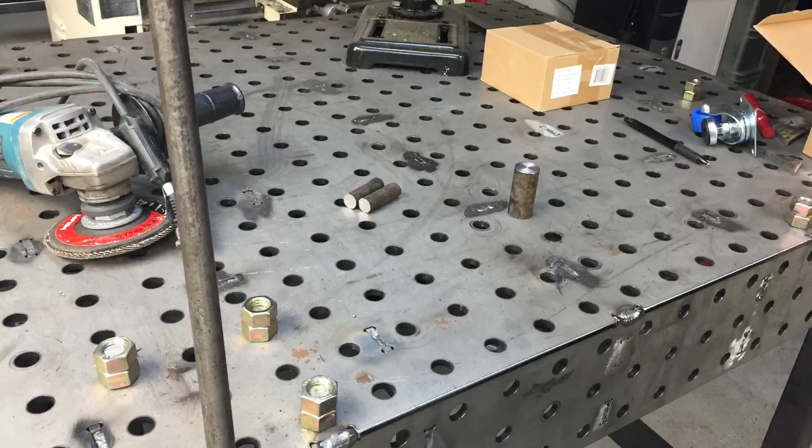Tonight we're going to make the first trial pin for this CertiFlat welding table. This is the 3648 fab block from weldtables.com, and hopefully you enjoy the video. If you were looking for something to get started, I think these are pretty handy.

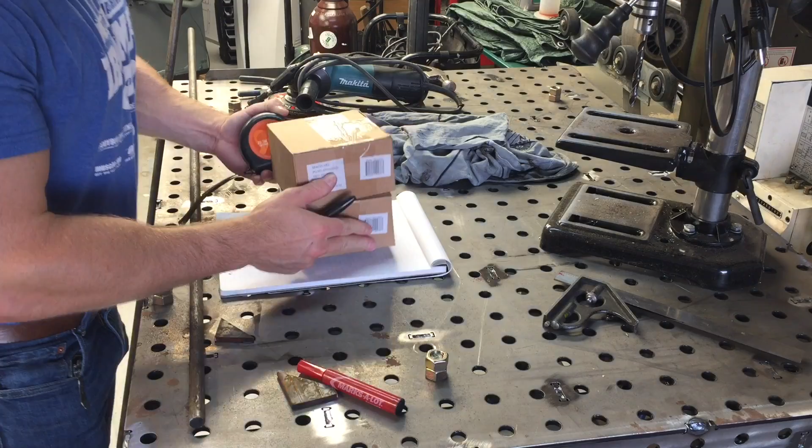Hey guys, got something I'm working on I wanted to share with you.

What I've got here is some 5/8 diameter 1018 steel, and what I was thinking was making some quick little... I don't know what these things would be called. I've never had a welding table with fixturing capabilities before, but for lack of a better word, I'm just going to call these things studs or pins. So I take the 5/8 diameter 1018 steel and cut off, let's say 2 inches for now. I'll cut a series of these off. Let's go ahead and mark this every 2 inches, and I'll do a couple as a trial run.

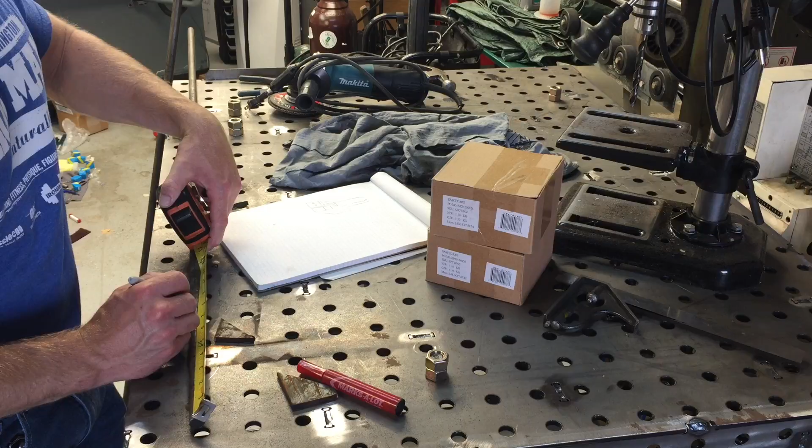What I'm going to do is take my portaband, my portable bandsaw, and cut these off. Then I'm going to take some more 1018 steel, in a 1-inch diameter. That way I can go ahead and locate these things wherever I need a pin dropped. I'll use this as the pin to actually fit inside of these holes.

These are 5/8 diameter holes, actually I think they're like 628 thousandths or so. Let me see here... anyway, I think these are about 628 thousandths, and this is 625 thousandths, so we'll have a pretty decent fit. It will allow a little clearance just to get in and out, and if there's any slag or something in the hole from the laser, these will still work.

So the whole point of this thing is to be able to do some quick, accurate layouts. The reason I was thinking 1-inch for the outside diameter of the top part of the pin would be so you have an easy number to work off of. These have a 5/8 diameter hole spaced exactly 2 inches on center apart from each other, so when you drop a 1-inch slug in here, you can work off that real easy. I like the 1-inch diameter, and you're going to need something stopping it from dropping all the way through anyway. So that's what I'm going to go with. We'll just make a couple and see what you think.

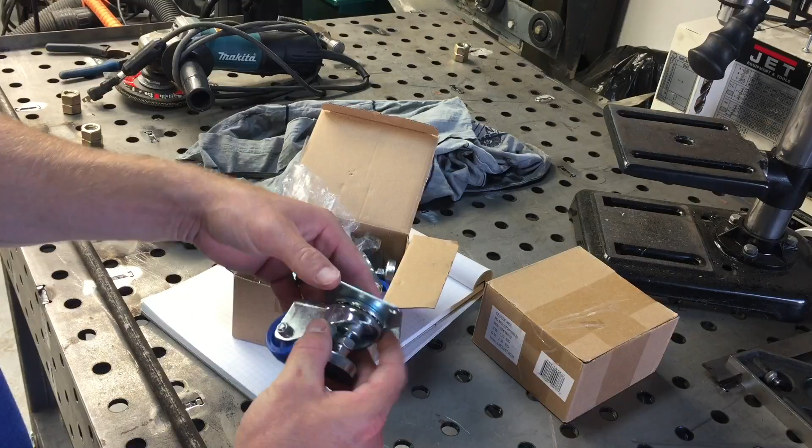Another thing I want to show you, not on that same subject, but I think it's pretty cool. You probably notice I put everything on casters around here because I have a really tiny shop and too many tools and projects going on. So I found these casters on Amazon. Obviously these aren't super industrial, but I think they have a capacity of about 200 pounds each. This is like an inch and 5/8 diameter wheel.

It's got an actual standoff or leveler on each one of these casters. You get a 4-pack of these for about 15 bucks. I think this is ridiculously cheap for the value it adds. As long as you're putting these on something that doesn't weigh a ton, you're going to be fine. Really cool find.

I wish I would have found them earlier. If I find some larger ones, I'm going to buy the heck out of those while they're available, because I'm constantly building stands for things, and what a nice feature to have, to be able to roll it into position, drop your levelers, and get the thing stationary. It's a perfect example of what I actually should have for this.

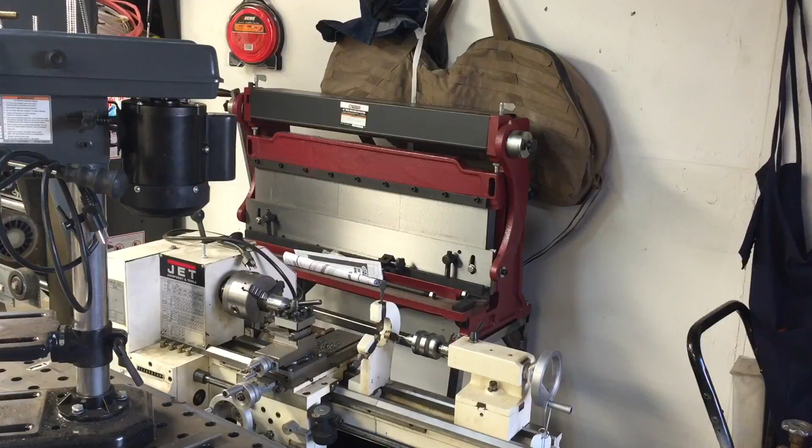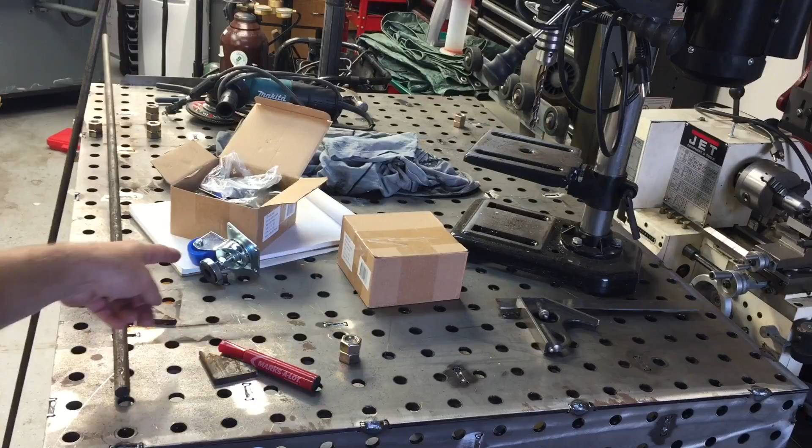So last week you probably saw the video for that 3-in-1 press brake, slip roll and shear, and I made that stand for it. Well, you know what, when you go to use that thing, you don't want the casters rolling, and even if you have locking casters, it's still going to shift a little bit. So it would be much better to go with these guys and be able to lower them down once you get it into position, and have something fairly sturdy.

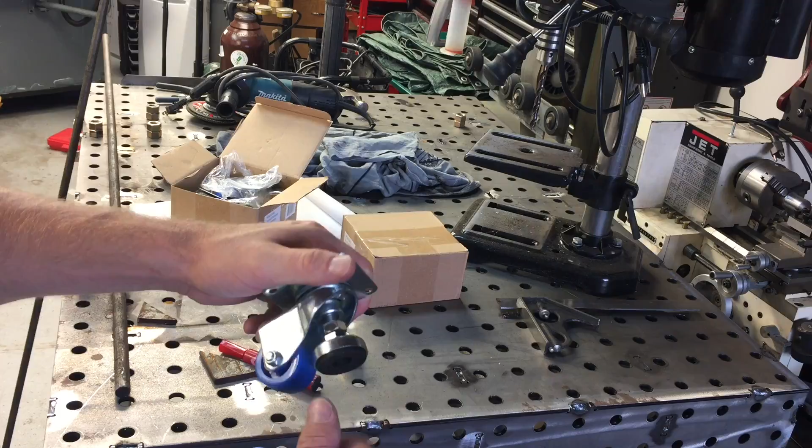Obviously I haven't installed them on anything yet, but I can tell the construction is at least as good as the Harbor Freight ones you buy, and they're probably less expensive than it would be to buy the same ones I put on that shear last week. So yeah, what a great little find.

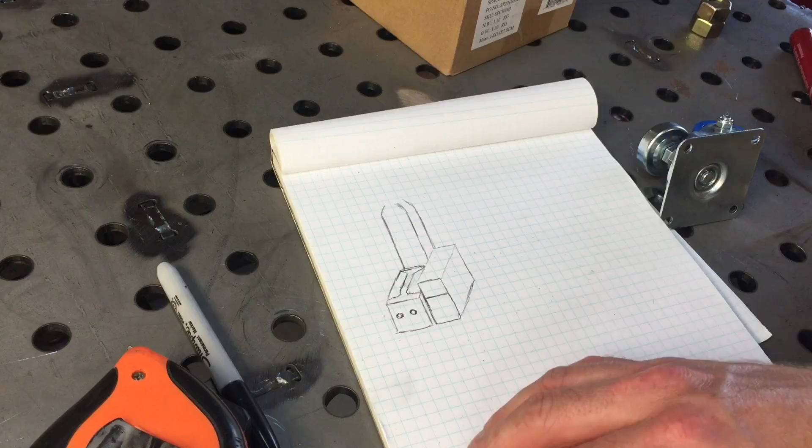All right, so I'm going to draw my idea so you guys can visualize what we're gonna be doing here. So like I said, we're gonna be taking that 5/8 diameter stuff and doing the deal with it.

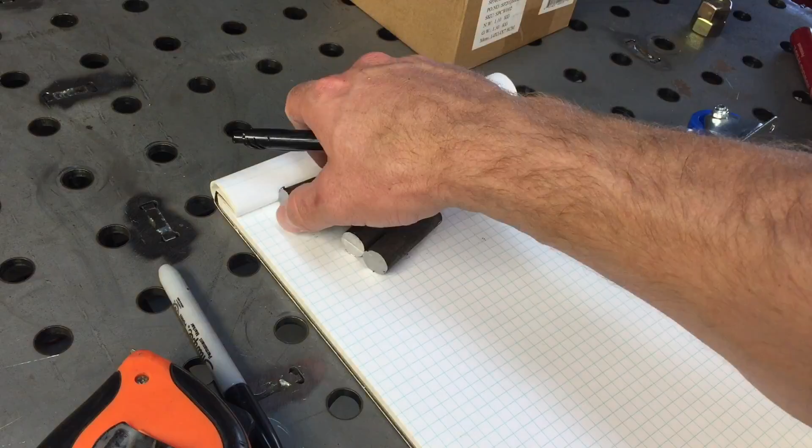Grab a pen here. So I've got a couple of these made now - shouldn't say made, I've done a couple of very rough cuts with the Portaband. Just marked them quick with a Sharpie and cut them off, so there's no real tolerances held there at all. But we've got 4 pieces, and just to show you the fit, it's in here. There's just a hair of wiggle.

So if you were to shove really hard on this, it could rock. But as long as the 1-inch diameter piece that's going to be shouldering and slipping down, basically touching against the flat surface of the table, you shouldn't have a hell of a lot of rocking like this. So hopefully that adds some stability to this.

This amount of slop isn't a lot. So anyway, I think for fabrication, as far as welding things up, this would be acceptable. As long as you had constant pressure against your pins, this slop would be eliminated. Say you wanted to do a 90-degree or whatever, you could have 2 of them here, as long as your piece was shoving up against that, and your next 2 pins wherever they're going to be, and then 1 more to the side. As long as everything's held tight, it will eliminate that slop.

There goes 1. Now, how this is going to go down, I will have one of these pins. Can't even draw a straight line.

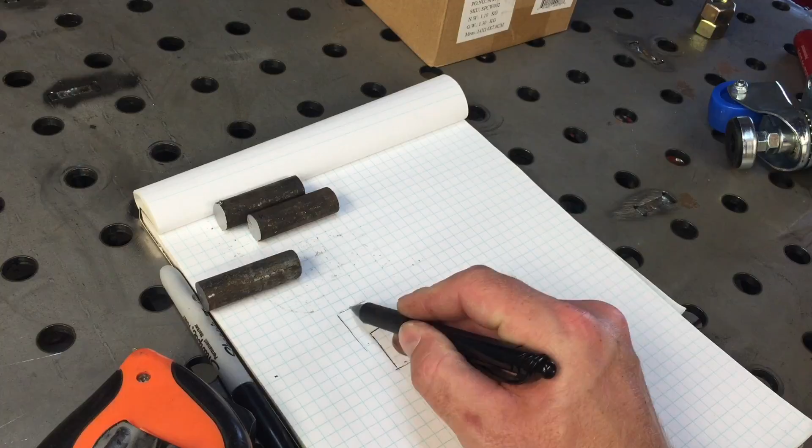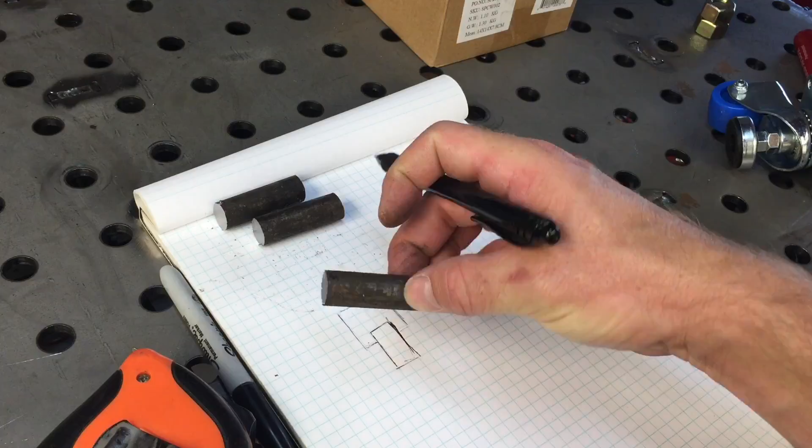We're going to have one of these pins, and then we'll have our 1-inch diameter. I don't know how tall I'm going to make this thing, I'm probably just going to make 1 or 2 or 5 and see what I think. And then what I was thinking of doing was having these recessed into a bore in that 1-inch diameter material. So we basically leave these suckers in their raw form, other than maybe cleaning them up a bit, getting that factory crap off of there, and then do a press fit into the 1-inch diameter piece. I think that'd be pretty slick.

Again, this pen's not working too hot, but I've got another one in my pocket.

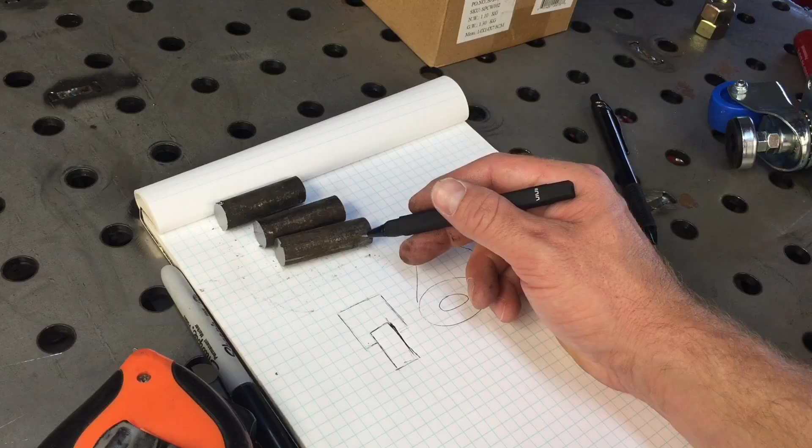So as an isometric view of that thing, the 1-inch diameter would be like this, and then it would have a slightly under 5/8. I don't know what diameter I should use for this - I'm gonna have to mic these and see what they actually come out to be once they're cleaned, and then I'll make this probably 2 thou under that, or whatever the press fit should be. I'm not sure, I have not done a lot of press fitting, but I'm assuming it's probably about 2 or 3 thousandths you'd want that to be over.

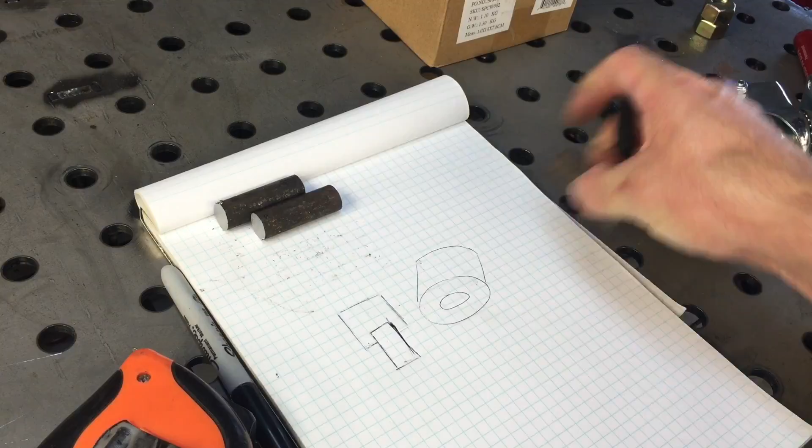And then if you want to do an interference fit, you could preheat your 1-inch diameter piece and chill your 5/8 diameter male part, and then stick it up in her. Yep, so that's the plan. Let's see what we actually do.

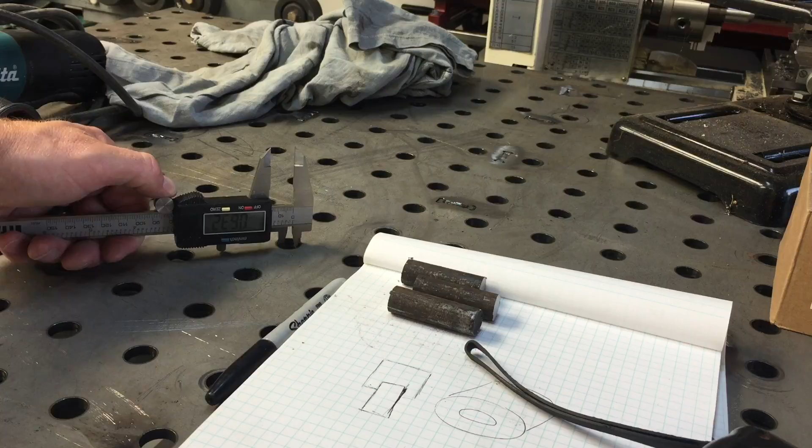All right, so we've got some inexpensive digital calipers here. These are cheap, but I found they're actually pretty damn accurate. So let's check our bore dimension of the table. Right there, I don't know if you can see that well, but I'm getting about 633 thousandths, .633. I'm sure as I rotate this, I'll probably get a slightly different size too.

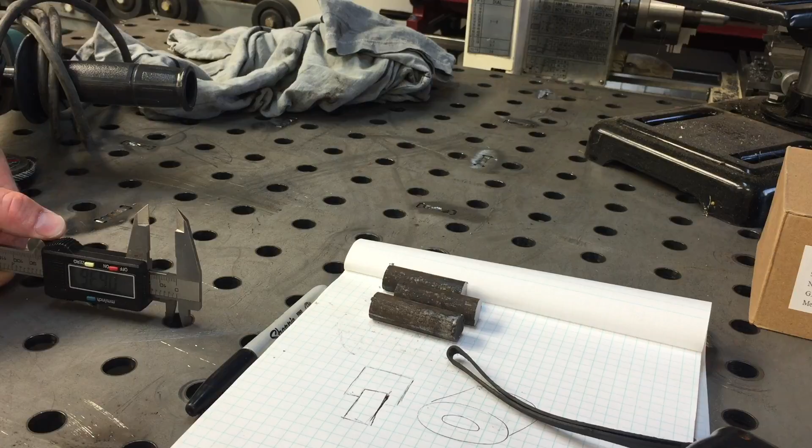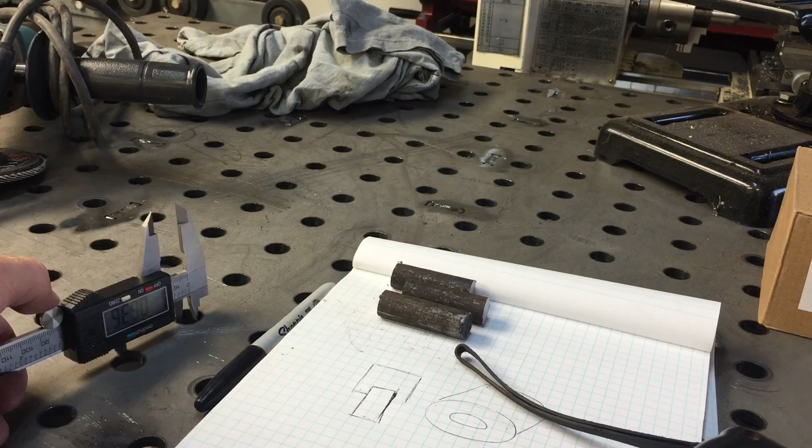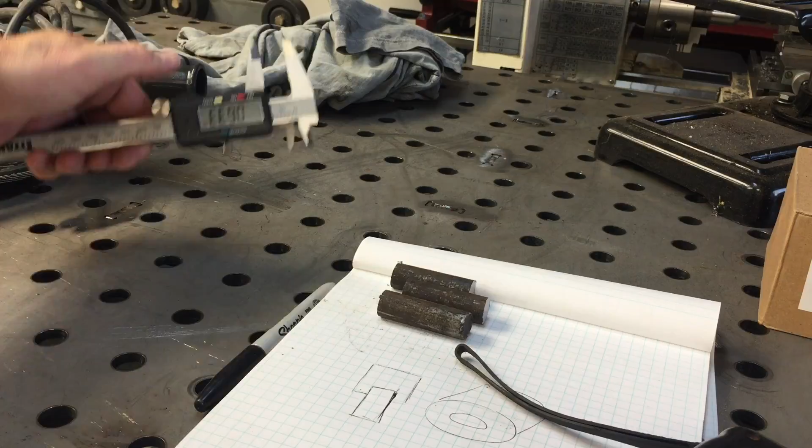I've got 635 there. Let's go around here - 635. So looks like 633 is probably going to be my small, 630, 632. So we'll just say we're going to get on average about between 632 and 635 diameter on these holes. I'm not going to measure them all, but that's what I'm getting here.

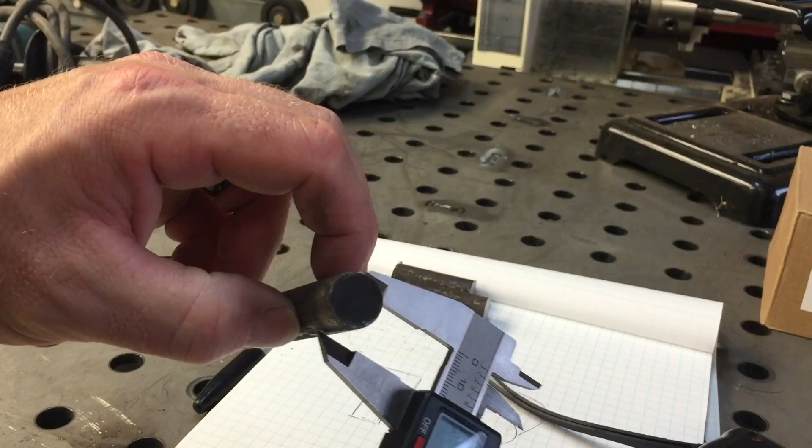So let's measure what these actual pieces come in at from the factory here. And I get 623, so it's actually a 10 thousandths difference. That's significant. I'm still going to make some and see how the fit goes and see if it works out good, because man, would that be convenient to not have to really machine much and then just pump a couple of these things out. Well, we'll see what happens.

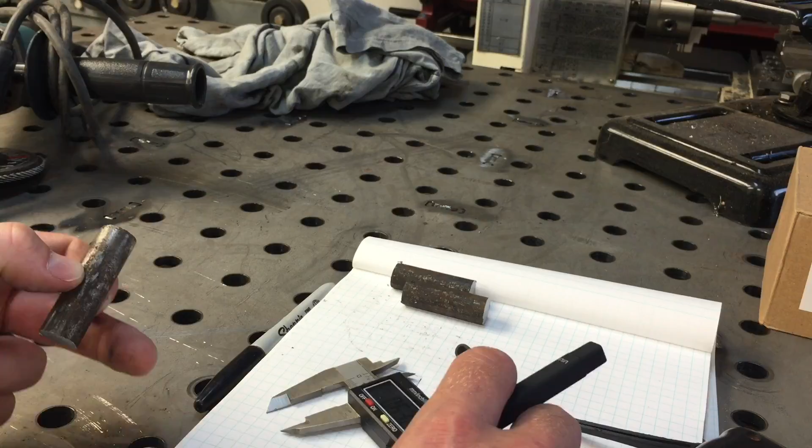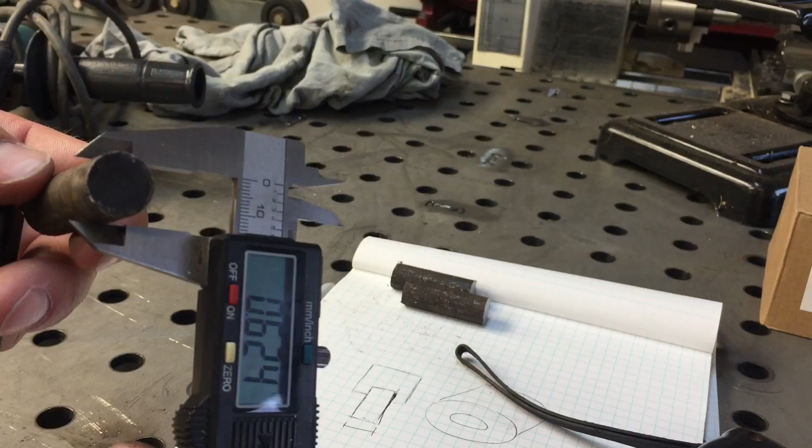So you've got that, the shaft diameter is - throw that on there again - 624, 623, 626, 622. There's a lot of crap on this too, so we'll just call it 623. Not that that matters because we're not going to be machining this down.

And then bore size, that we'll try to machine this down to. Let's say 620 as a tentative, 620 thousandths tentatively right now.

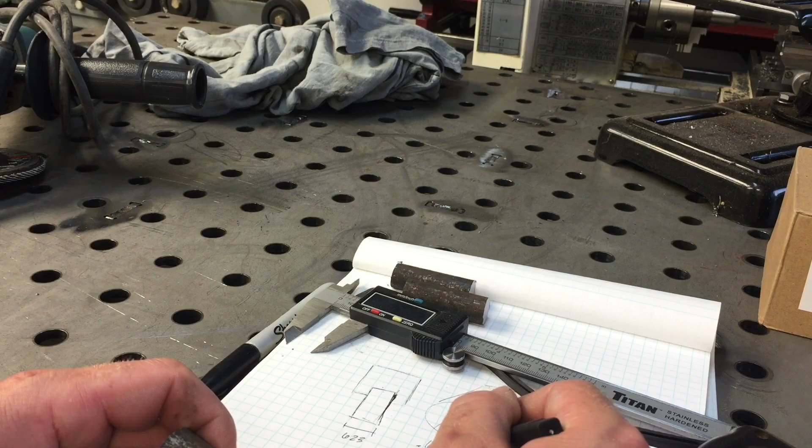You know what, let's take a time out on that little 5/8 diameter piece and let's focus on getting one of these bastards prepped. This is the 1 inch diameter guy.

I want to get one of these set up because I'm thinking of just drilling a hole with this drill bit I've got on the tailstock really quick, and then doing a quick trial press fit deal.

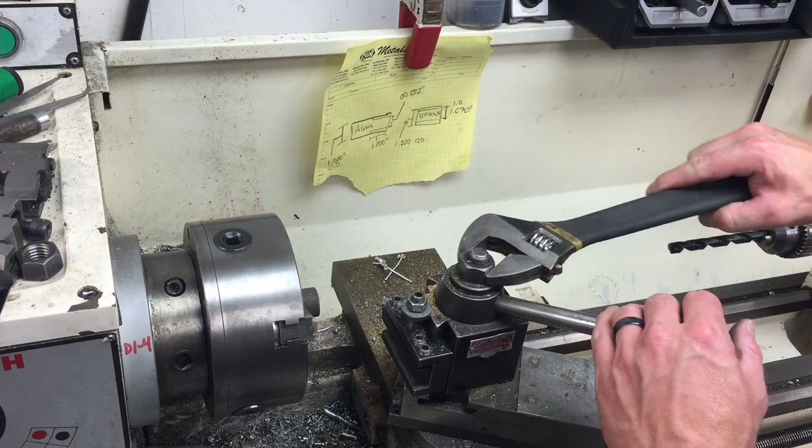I'm using the world's cheapest indexable cutters right now. This one's actually set up for doing threading, but I'm going to give it hell and see what happens. It's actually kind of hard to get in and get a really nice view while filming.

I gotta be honest, I'm not crazy about having the tripod wrapped up around what I'm trying to work on either, but I guess it's just a sacrifice for making these videos.

Alright, so that is machining great. I've actually got that faced off enough to where I could call it good. I'm going to take just a hair more though. I want to make sure the whole surface is flat.

So if you're new to machining, let me shut this off. You'll notice that when people are operating the lathe, they only bring it across halfway, because since the work is rotating towards you, the cutter only has to cut half of the diameter, and it's going to be getting the other end of the work too.

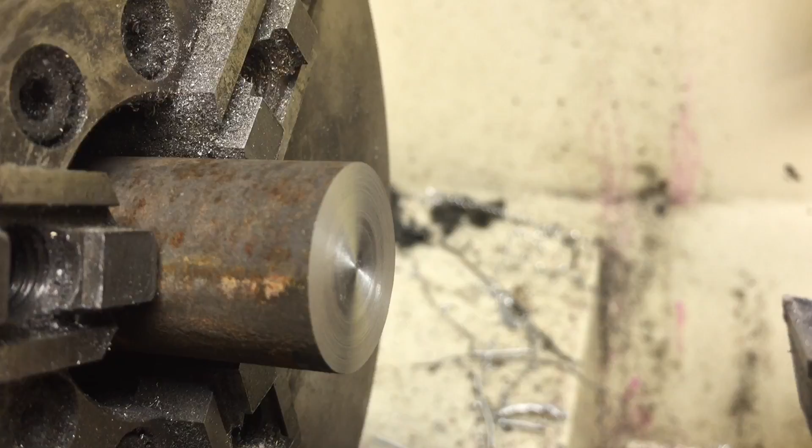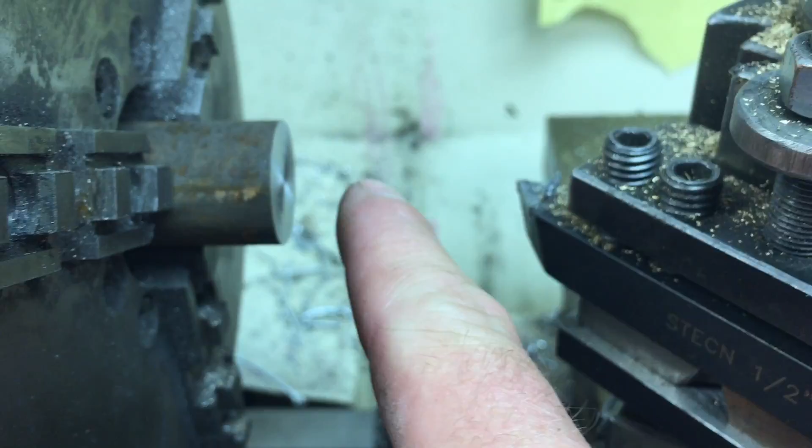So once we back away, you'll know if your tool is centered properly or not, because if it's too low or too high, you can end up with a little nipple in the middle of the work. Let me get in closer so you can see. On this piece, we don't have much of a nipple because the cutter itself is centered properly.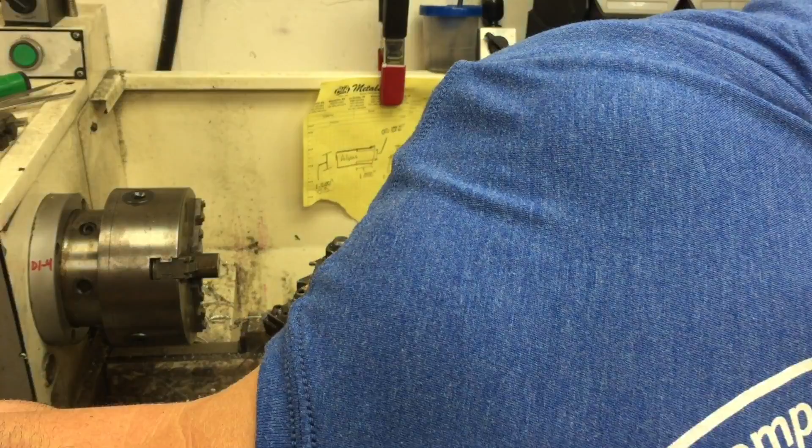Okay, now that I've got this part faced off, what I'm going to do is go ahead and get a center drill set up in this tailstock. I've got a 3-jaw Jacobs chuck here, and I'm just going to come in here and do a quick center drill. I'll put a little bit of cutting oil here, and I'm going to run it at 755 RPMs. That's good enough.

So I'm going to get the tailstock pretty close and lock it. I'm going to go ahead and just go in. This will allow our drill bit to be centered. Alright, that's a good start. I'm going to back this out.

This drill bit's a 29/64. Put a little bit of oil on that guy too. And we're also going to slow this machine down. I'm going to go down to 460 RPMs really quick, because that'd be a little fast, I think. You'll know if this is too fast, it's going to squeal like hell. We call it chatter.

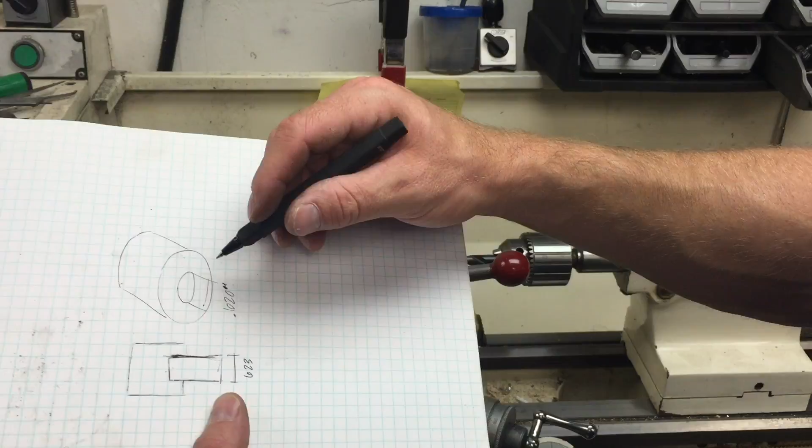So like I said, we started off with this as the general idea, but we've already switched. This was an ID, inside diameter, of 600 and what was that? I think it was 623. Just let me verify.

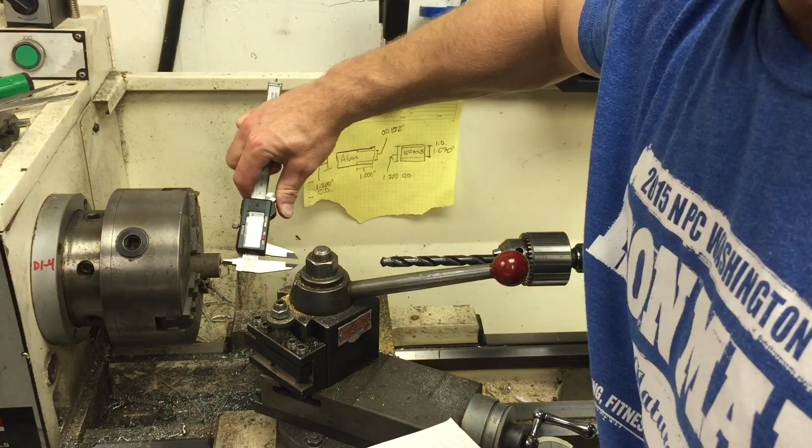Just making sure I'm not losing my mind here. 460. 461. Jeez.

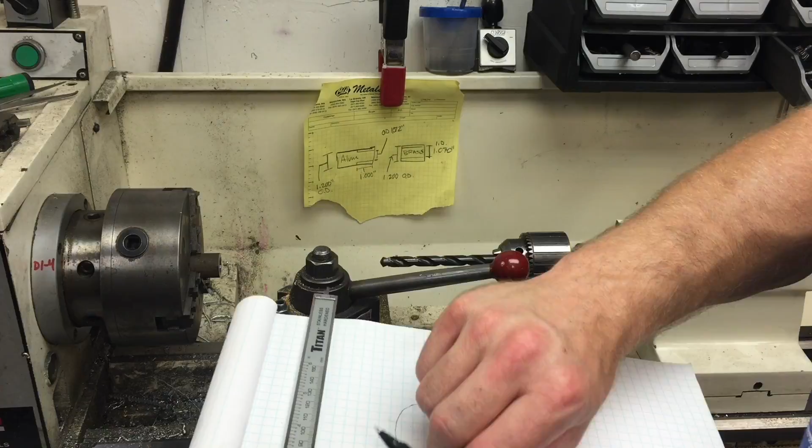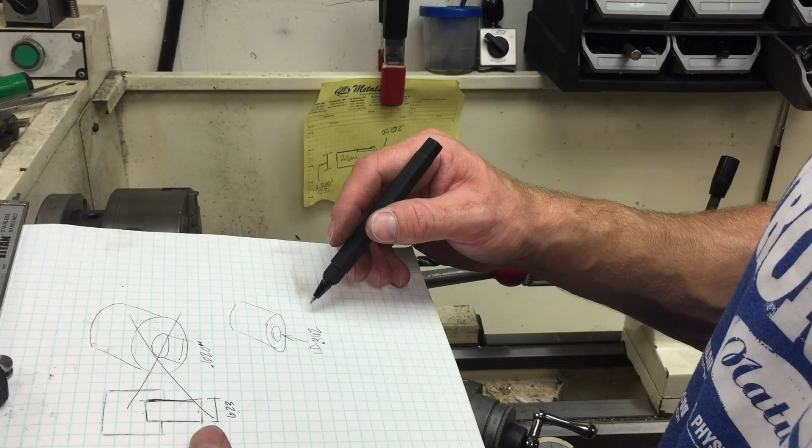Yeah, let's call it 462 thousandths. I'm going with the largest number because I don't want to go with the smallest one and then have the shaft be wrong. Actually, I should be going to the smallest. 462. Well, we're going to go with the male end OD at 465, see how that fits. So we're going to make that 465 thousandths.

It's not a good idea to store a bunch of crap up here on top of your lathe. It's not a tool stand, so don't do this. But if it's your shop, you do what you want. It's really not ideal, and it's a bad example to set for people that are trying to learn how to do this.

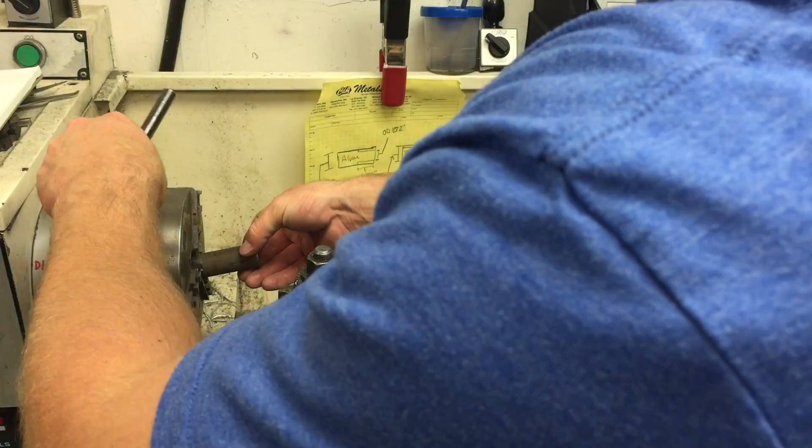All right, so let's pop our part back out of here. And since I'm here, I'm going to clean up this guy real quick. It's still got a crappy cut on there, so I'm going to face that off as well, real fast.

Close up. Machinists will think this is boring. People that don't know how to use these machines will think this is magic, like me.

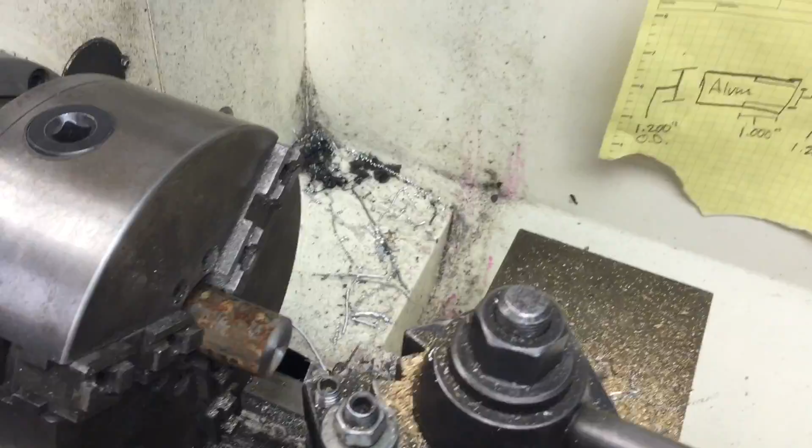Okay, that was easy. So now we have the top of that faced off well. Another thing you should do while you have it in here is get a file and clean this up. I'm going to use both hands for this. You can go ahead and take your file, be damn careful. You can go ahead and just lightly pass it over the edge.

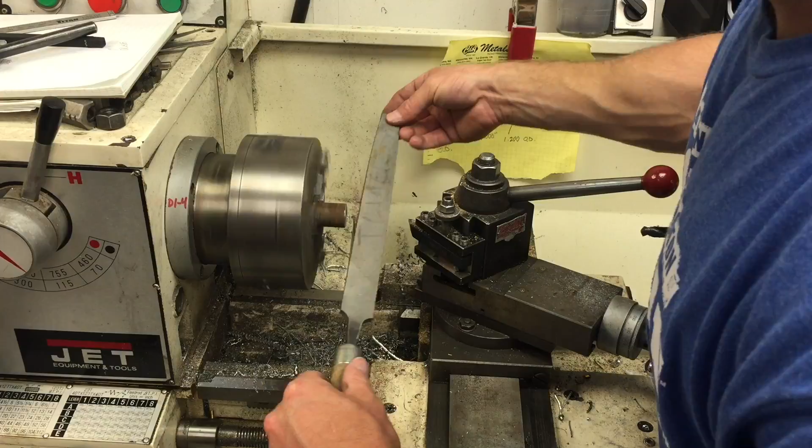And you leave this hand available to break free, because if this thing ever grabs onto it with the chuck, you can go ahead and let it go. You don't try to manpower it, because you're not going to overpower the machine. But the whole point of that is just to clean up the edge so it's not sharp, okay? It's good, especially if you're going to give this to somebody else to handle.

Some people don't understand that raw machine steel is sharp as hell on the corners if it's fresh and hasn't been deburred. So you don't want to hand parts over to people to check out, like say your friend's over. Deburr it before you hand it over to them. Don't expect people to use their brain. I'm actually going to do the same thing to this side really quick. Just real fast.

That's it. Okay, now we've got one of these top pins, whatever we're going to call this. I'm going to come up with a name by the end of this project. So, got one of those done. Now we need to get that little guy back in there, chuck it up, and we're going to want to machine that down to 465 thousandths.

Let me clean up this other edge real fast. And let's go back here. Okay, so right now we're at 566 thousandths. So let's do some work.

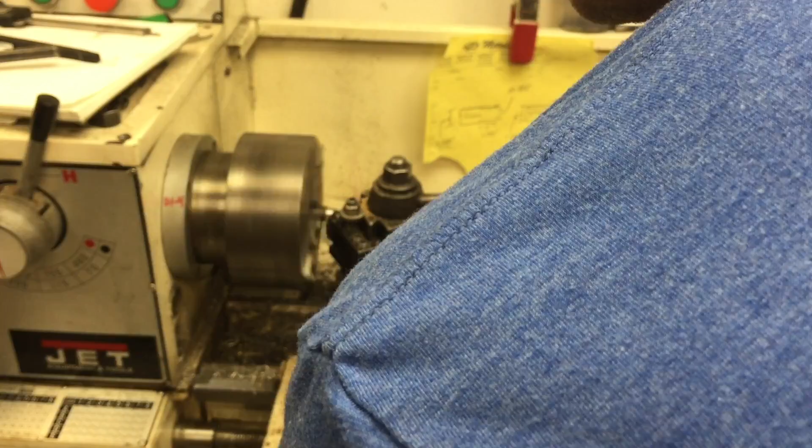Now we should, right about here, we should be about a half inch. We're going to do a quick measurement just to see if we're on track. Should be about a half an inch. We're at 488 thousandths, so we're about 20 thousandths out.

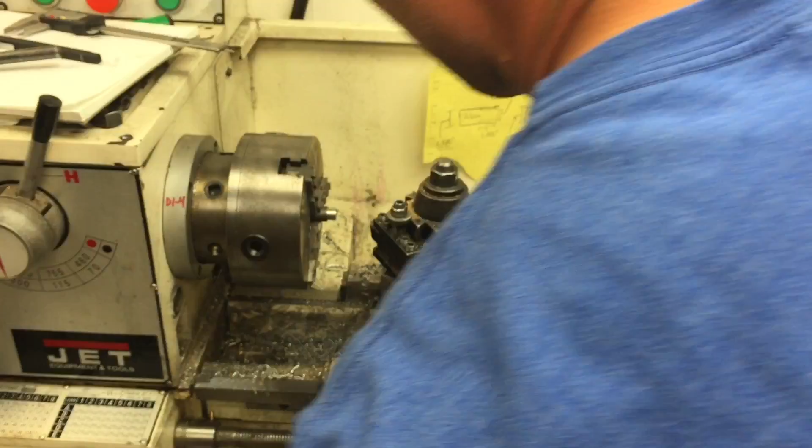I'm gonna do a quick cleanup pass here. I'm gonna get this feed rate slowed down. Okay, I'll back this out, take another quick measurement. 479. 479 again. Let's go ahead and take, I'm going to go down to 465, so I'm going to take another 10 thou.

468 to 469. Try to take about 3 or 4 thousandths off real quick. Hold on a second.

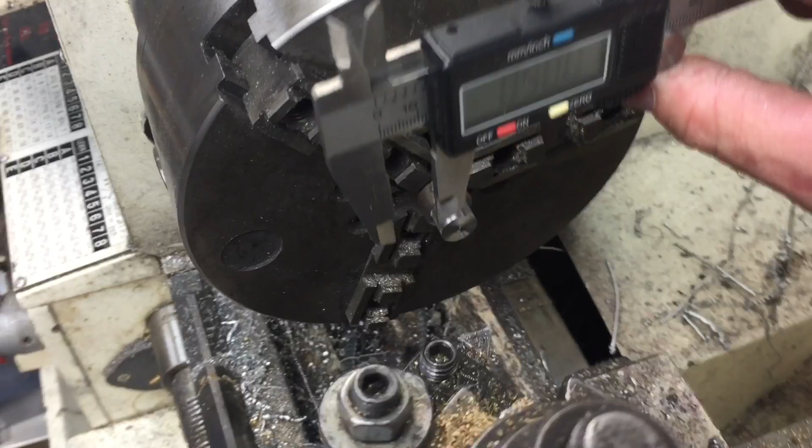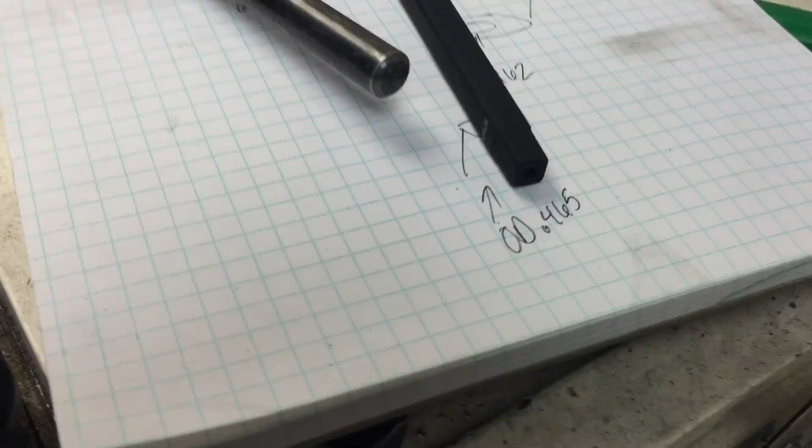Okay, so I'll pull this out. I'll take a quick look at our measurement. Get you guys in here for this. 464, 465, 464 and 5, 465. So that was our goal, 465 thousandths.

Can I get this with my finger? That's the real question. It's going to get too tight. I will use the handle. A lot of the things that I've been pressing aren't this tight. That's some force, man. Gotta tighten that up again.

That's all the way down now. So what happens with all that air pressure that's in that damn thing? So however many tons of pressure that just took, that means that thing's under all that pressure right now. Huh. I guess the friction of the fit is greater than the amount of force that's built up in air pressure. So...

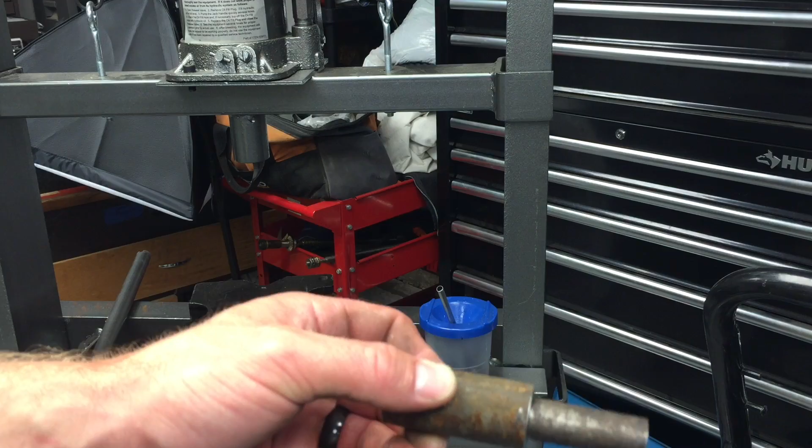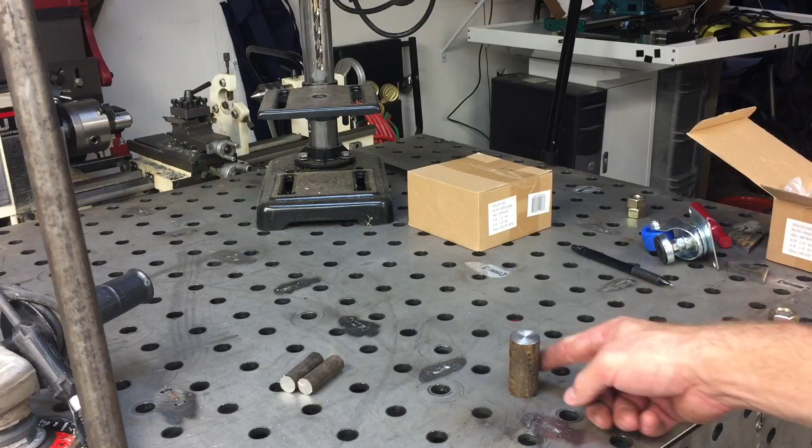Is that acceptable? I'm borderline thinking it's not. What do you think? Fabricators out there, tell me what you think. I think we've got, I'm not crazy about that much wobble. If you can hear it doing this, that's not that great. I'd rather have it tight.